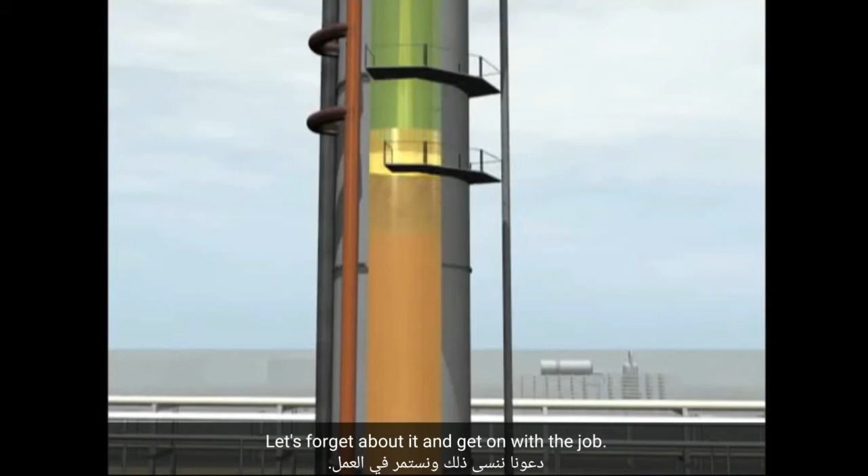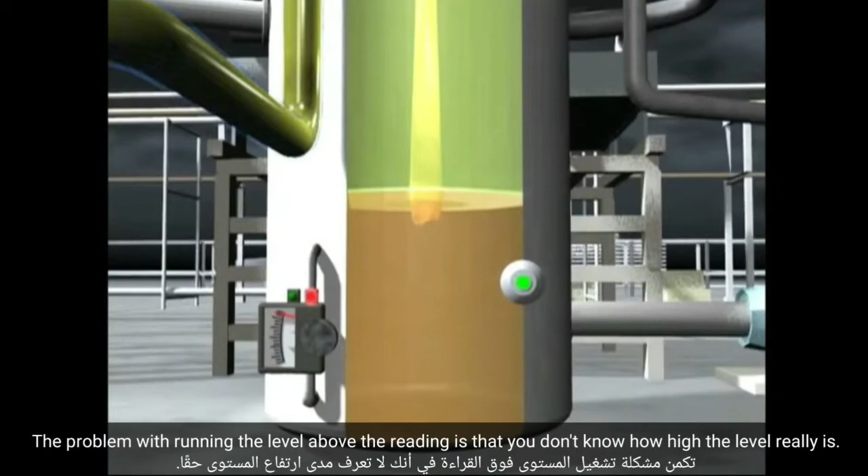For example, BP wasn't investigating abnormal conditions that were occurring repeatedly during startups of the ISOM unit. The CSB examined 19 previous startups in the 5 years prior to the ISOM incident and found in the vast majority of these startups, the operators ran a high level above the range of the level transmitter. The problem with running the level above the reading is that you don't know how high the level really is. This can lead to grossly overfilling the tower.

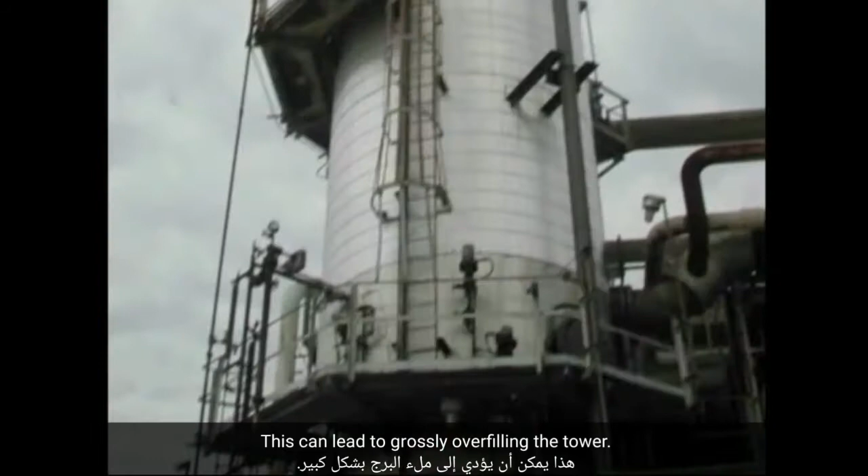But even though high levels and pressures could have led to a catastrophic accident, the previous startups were never investigated as near misses, and procedural deviations became accepted as normal. The CSB investigation also found 8 serious releases of flammable vapor from the ISOM blowdown drum, 2 of which caught fire between 1994 and 2004. Only 3 of the incidents were ever investigated.

Well, it's widely recognized now that you should investigate near misses, or really near accidents, what they call near misses, as thoroughly as you investigate accidents. After all, it's only a matter of luck whether a leak of flammable liquid or gas catches fire or not. In our final report, the CSB recommended that BP's Board of Directors establish a system to encourage reporting of incidents without fear of retaliation, to investigate and implement prompt corrective actions, and to communicate lessons throughout the company.

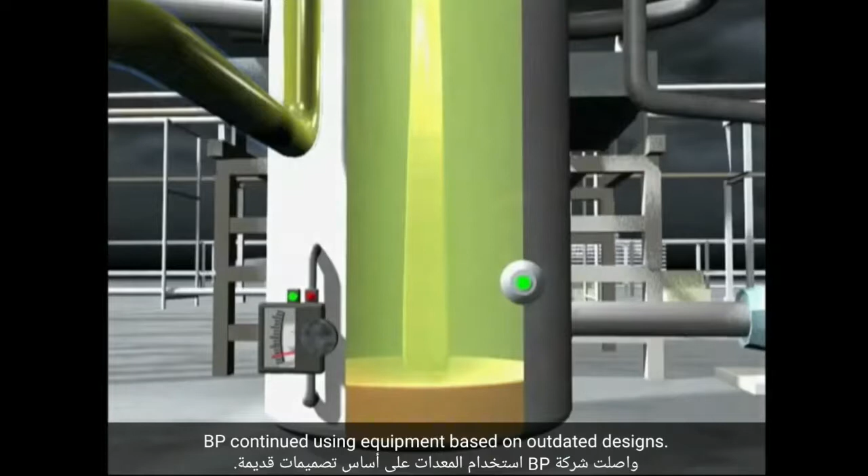The first choice after an accident is to say, how can we improve the design so this can't happen? How can we remove the opportunity for errors? Even as releases occurred over many years in the ISOM unit, BP continued using equipment based on outdated designs. The raffinate splitter tower lacked modern design safeguards, such as redundant level indicators and alarms, a differential pressure indicator, and automatic interlocks to prevent overfilling. In a well-designed plant, a simple error like closing the wrong valve shouldn't result in an accident.

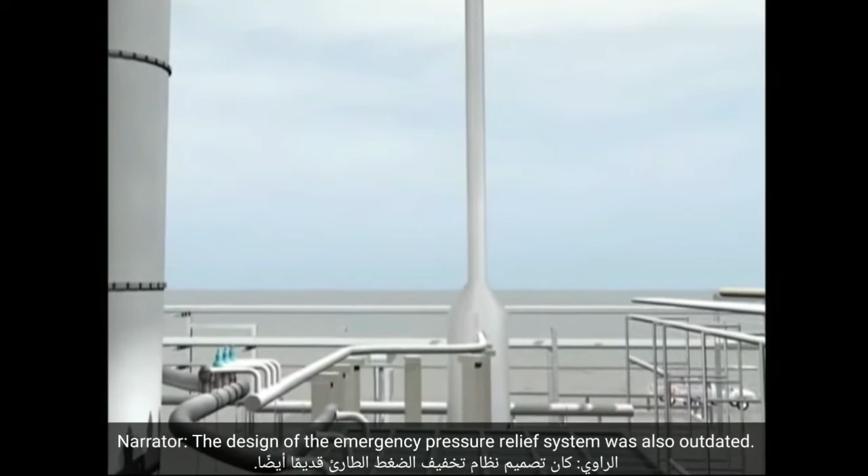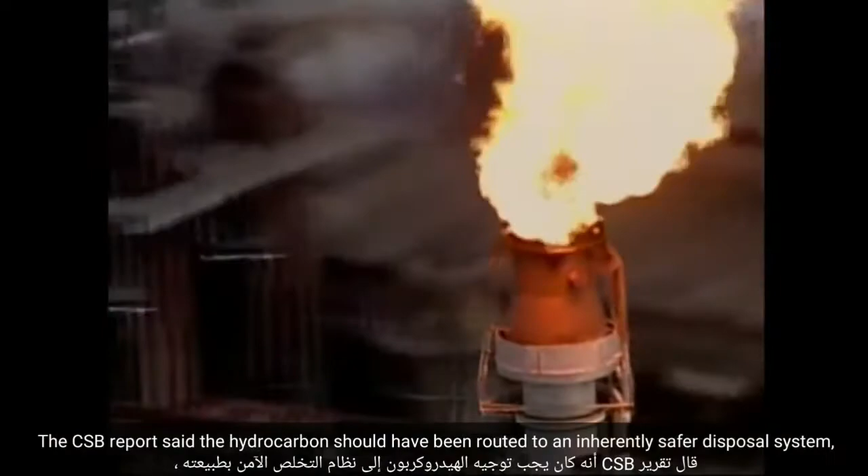The design of the emergency pressure relief system was also outdated. Relief valves vented hydrocarbons directly to the atmosphere through an antiquated blowdown drum, which was first installed in the 1950s. The CSB report said the hydrocarbon should have been routed to an inherently safer disposal system, such as a flare, to contain the hydrocarbon liquid and burn off flammable vapor.

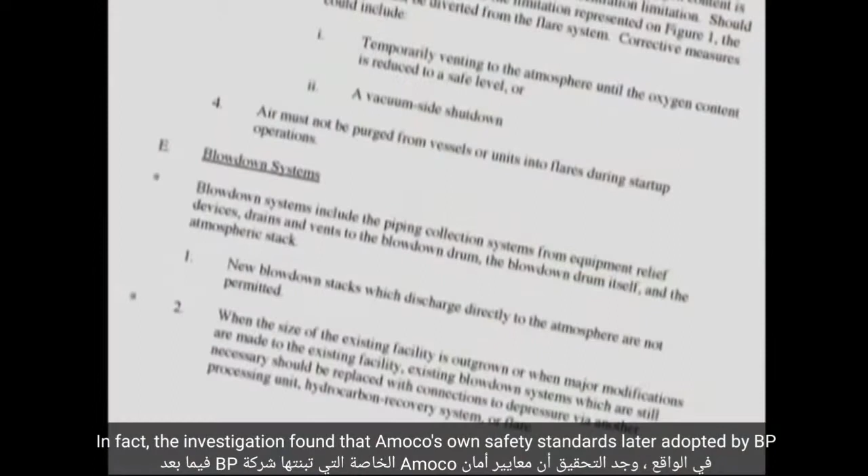In fact, the investigation found that Amoco's own safety standards, later adopted by BP, stated that new blowdown stacks which discharge directly to the atmosphere are not permitted. As facilities were upgraded, existing blowdown systems which are still necessary should be replaced.

Several occasions prior to the incident, BP had seriously considered connecting a flare to the ISOM unit. In the early 1990s, when Amoco owned the refinery, 3 proposals were made to replace blowdown stacks at Texas City. 2 more proposals were made in 2002 after the merger with BP. However, these decisions were impacted by production pressures and budget cuts, and the flare was never constructed.

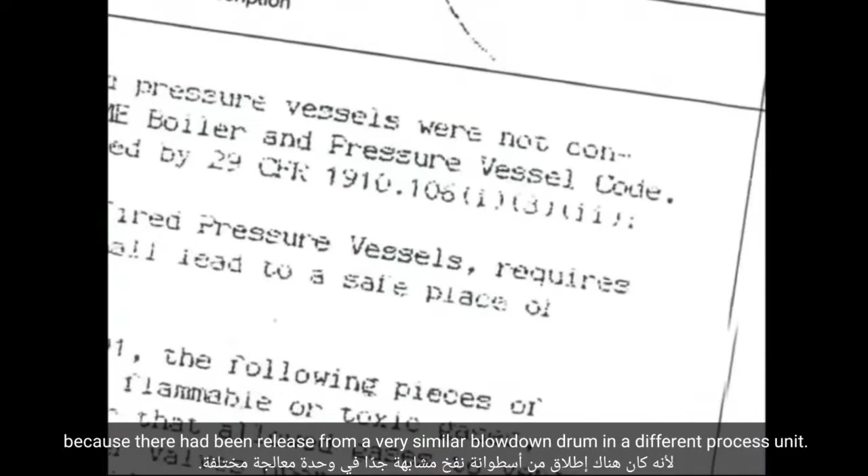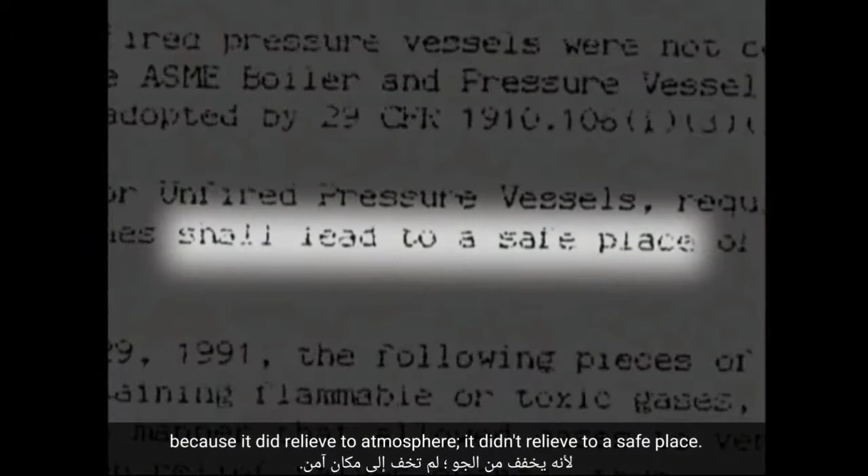In 1992, OSHA conducted an inspection at the Texas City refinery because there had been a release from a very similar blowdown drum in a different process unit. OSHA cited the then Amoco refinery for the unsafe blowdown system. OSHA determined that the design of the blowdown drum was unsafe because it did relieve to atmosphere. It didn't relieve to a safe place. But OSHA later withdrew the citation after Amoco asserted the equipment conformed to American Petroleum Institute standards.

In October 2006, the board issued a recommendation to the American Petroleum Institute calling for new guidelines that warn against the use of blowdown drums similar to those found in Texas City. We also recommended that OSHA implement a national emphasis program for all oil refineries focused on the hazards of blowdown drums that release to the atmosphere. Whenever possible, companies should use inherently safer systems, such as flares, instead of blowdown drums.

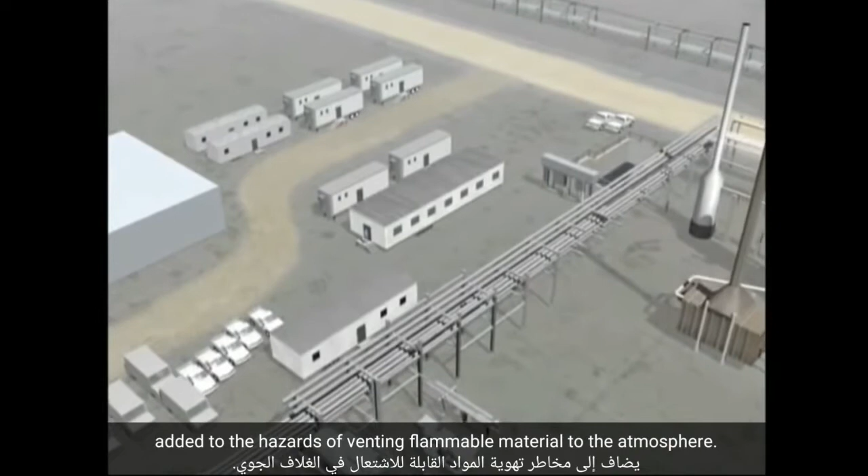The presence of occupied trailers near the blowdown stack added to the hazards of venting flammable material to the atmosphere. Prior to the incident and prior to the startup of the ISOM unit, a number of occupied trailers had been placed close to the ISOM unit. These trailers are occupied by workers who are not involved in the turnaround activities in the ISOM unit. The investigation found this was a key factor leading to the deaths of the workers.

They were right on top of the process in trailers as close as 120 feet from the blowdown drum, which is right at the edge of the isomerization process. CSB investigator Mark Kaszniak. Well, it is not safe to have trailers that close to a blowdown drum or at the edge of an active process in a petroleum refinery.

During an explosion in a refinery, you're actually safer in the open atmosphere than if you were working inside of a trailer. This is because the explosion overpressure will destroy the weak trailer construction, resulting in the formation of missiles and walls collapsing, which is potentially fatal to the occupants. The CSB determined that industry siting guidelines did not adequately protect trailer occupants from the fire and blast damage that can occur hundreds of feet from an explosion like the one at BP.

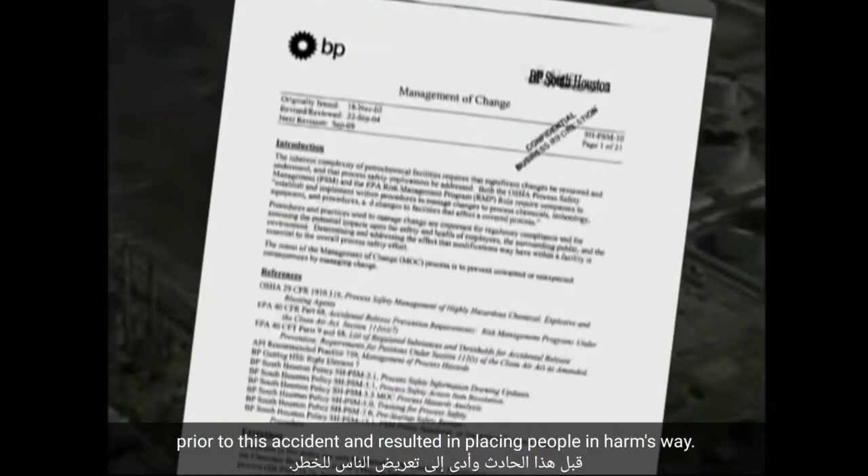We found that these guidelines were not safe enough prior to this accident and resulted in placing people in harm's way. In addition, BP did not follow its own management of change procedures before placing most of the trailers in a dangerous location. They did not assess the blast hazards posed to the trailer, and action items that were created during the review were never followed up and corrected. Ultimately, the decision on where to place the trailers was largely based on convenience, not safety.

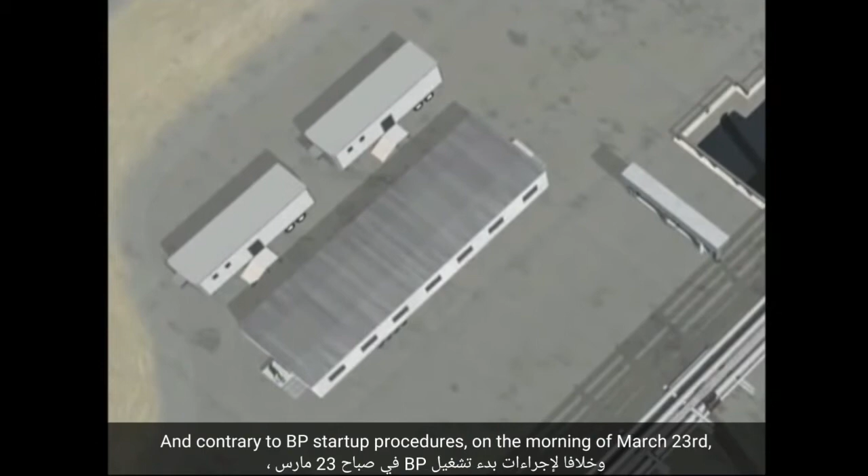And contrary to BP startup procedures, on the morning of March 23rd, managers did not remove personnel from the nearby trailers or even alert them that the potentially hazardous startup was taking place. The explosion totally destroyed 13 trailers and damaged 27 others, some as far away as 1,000 feet. People inside trailers as far away as 479 feet were injured.

In October 2005, the CSB issued an urgent recommendation to the American Petroleum Institute to revise industry standards and establish minimum safe distances for occupied trailers away from hazardous process areas. On June 21, 2007, the American Petroleum Institute issued new industry guidelines to minimize the presence of people and occupied trailers in hazardous process areas.

For a long time, people were saying that most accidents were due to human error. And this is true in a sense, but it's not very helpful. It's a bit like saying that falls are due to gravity. There were a number of human errors that contributed to the overfilling of the tower and the disaster that followed at Texas City. No one shows up to work planning to make mistakes. So we looked at the conditions in the workplace that would make error more likely. You really need to look at why the operators did what they did.

CSB Human Factors Specialist Cheryl MacKenzie. There were a number of human factors issues involved with this incident, including fatigue of the workers, training that was insufficient, and procedural deviations that occurred during the startup. The CSB investigation found that underlying conditions in the ISOM unit encouraged operators to consciously deviate from written operating procedures.

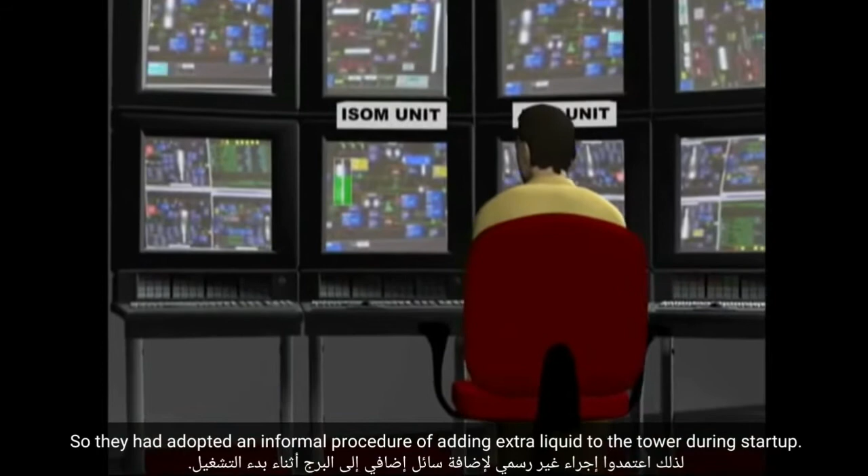The investigation found that operators were concerned that if they let the liquid level in the tower get too low during startups, it would damage the furnace. So they had adopted an informal procedure of adding extra liquid to the tower during startup. To do this, they placed the level control valve in manual, not the automatic mode required by procedures, and left the valve closed to raise the liquid above the recommended 6.5-foot level.

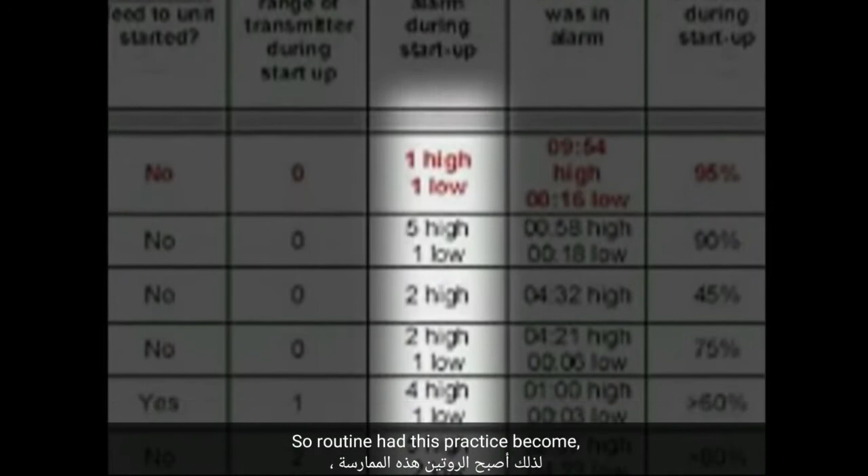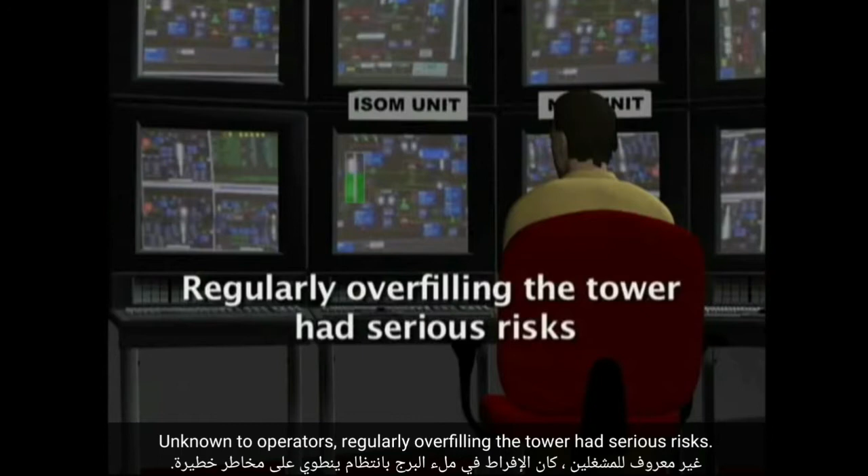So routine had this practice become, the CSB found that the tower's high-level alarm had activated 65 times during the previous 19 startups. The outdated operating procedures for the unit did not establish any safe upper limit for the liquid level in the tower. Unknown to operators, regularly overfilling the tower had serious risks. The tower's liquid level transmitter had a limited range, and should the liquid rise above the maximum reading of 9 feet, operators could not know if the tower was dangerously overfilling.

This informal practice of running the level in the raffinate splitter tower above the range of the transmitter led to running blind. They weren't aware of the dangers of overfilling the column, and so they tended to err on the side of what they saw as caution by overfilling the column. So their systematic deviation from what they should have been doing was actually well-intentioned. It was with the interests of the company at heart that they were violating the startup procedures.

But on the day of the accident, the routine deviation, overfilling the tower above the range of the indicator, coincided with a number of instrument failures, which impaired the board operator's decision-making. This had tragic results, as the board operator lost awareness of just how high the level was.

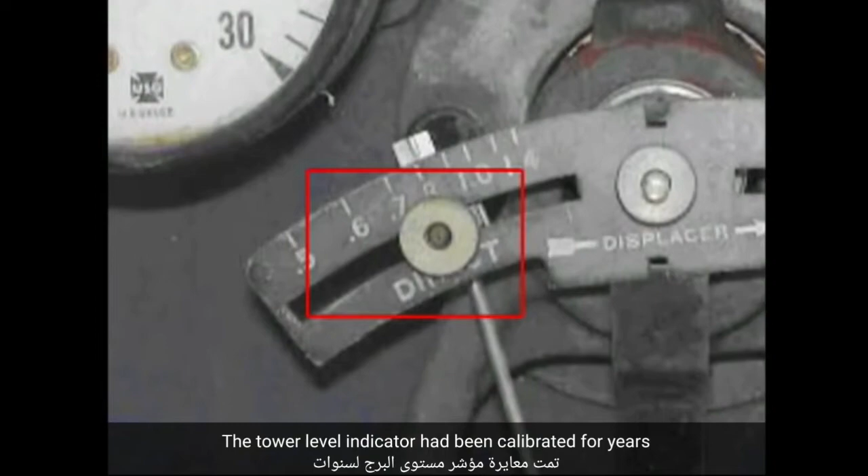The tower level indicator had been calibrated for years based on 1975 data for a different liquid used in a different process. As a result of the miscalibration, the indicator showed the level in the tower was declining just prior to the explosion, when it was actually increasing. And a backup high-level alarm on the tower failed to activate, seeming to confirm that the liquid level was dropping.

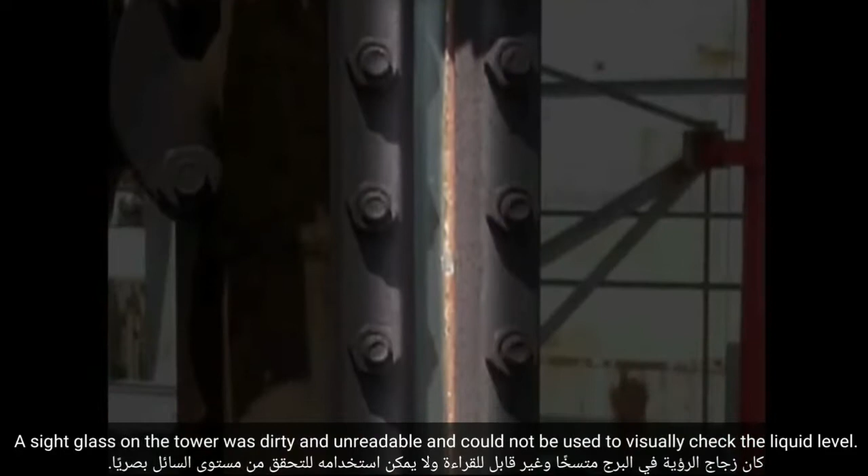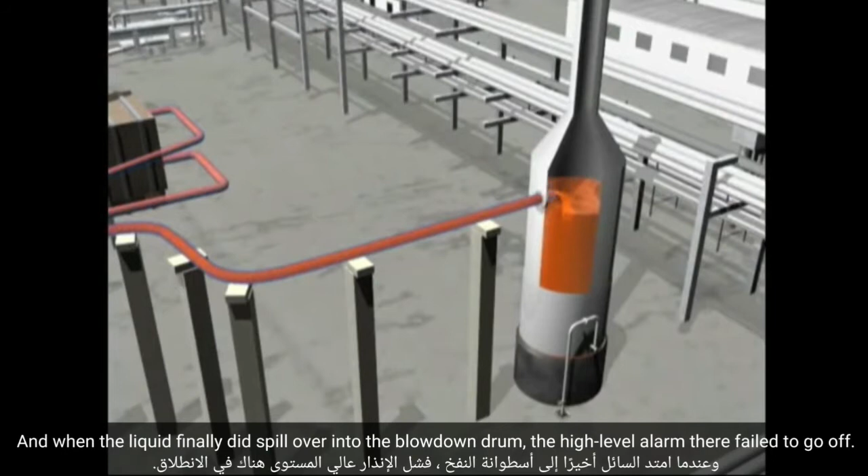A sight glass on the tower was dirty and unreadable and could not be used to visually check the liquid level. The investigation concluded that the board operator truly had no functional and accurate measure of the tower level on March 23, 2005. And when the liquid finally did spill over into the blowdown drum, the high-level alarm there failed to go off. BP procedures required that alarms in instruments and other equipment be checked for their functionality prior to startup. The CSB determined that these checks were largely not performed.

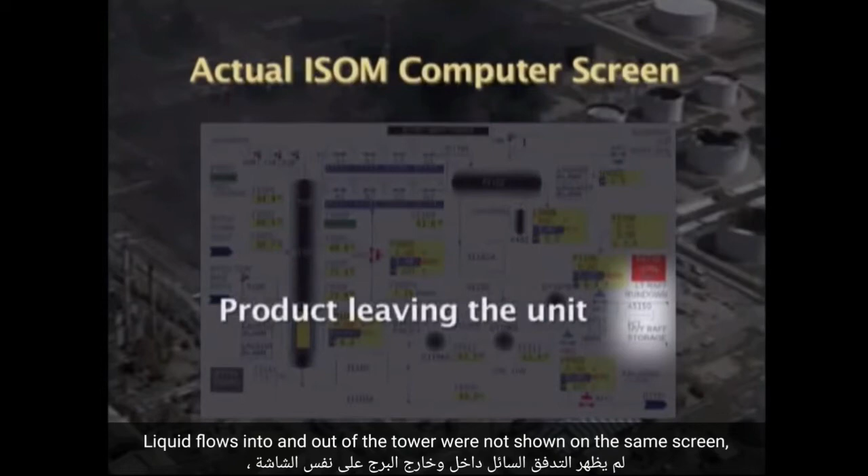A poorly designed computer display in the control room added to the difficulty of determining if the splitter tower was overfilling. Liquid flows into and out of the tower were not shown on the same screen, even though the computer could have been configured to do so.

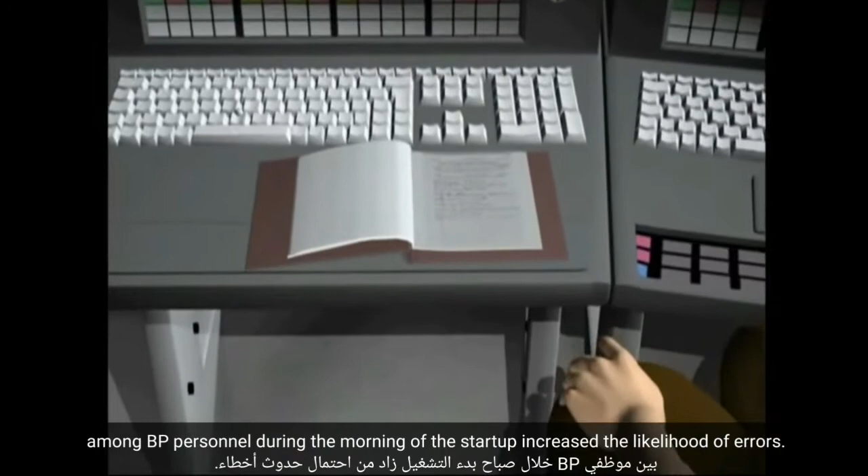The investigation also found that communication problems among BP personnel during the morning of the startup increased the likelihood of errors. Operators received contradictory instructions on where to send the products from the tower, and the day shift operators never got clear information from the night shift about how much liquid the tower already contained.

Well, then the board operator and the other operators that came in during the day shift really didn't understand what had occurred the night before. So they're starting up this unit without full knowledge of the state of the unit, and they're making judgments and decisions based on incomplete information.

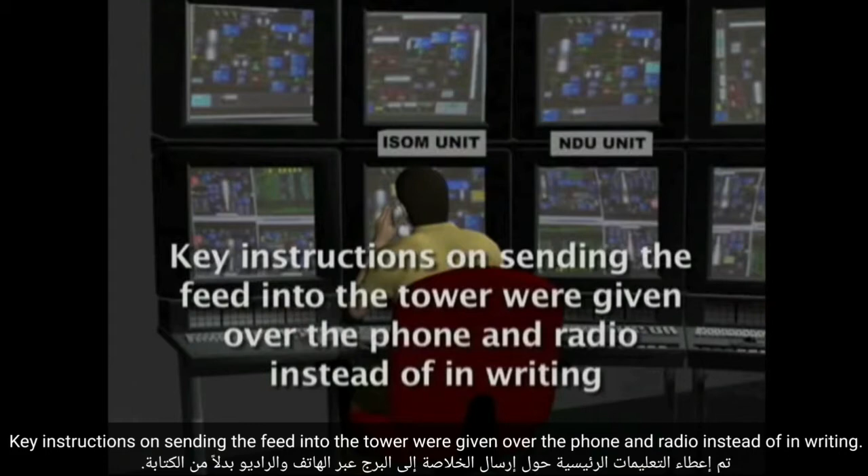The investigation found that BP lacked adequate policies and a management emphasis on effective communications. Key instructions on sending the feed into the tower were given over the phone and radio instead of in writing. Operators later told investigators these verbal communications were rushed and vague. Written communications in the logbook were brief and unclear.

Night shift operators did not conduct a crucial face-to-face meeting to brief day shift operators on the conditions in the unit. Therefore, they didn't realize how much liquid was in the tower and the equipment, so they added more, which led to the subsequent overfilling of the tower, which later led to the release.

The opportunities for human error were multiplied by the lack of adequate supervision, staffing, and training at the refinery. Training had been downsized, and that training was largely delivered through computerized means rather than face-to-face training. BP did not train operators on the hazards of overfilling towers, and training for abnormal situations was insufficient.

Despite recommendations dating back 5 years, simulators were not used to train board operators on making critical decisions. As noted in an internal BP email about simulators 3 weeks after the accident, "Big pushback has always been initial cost." Budget pressures also impacted control room staffing. BP implemented a 25% cost reduction in '99.

During the same time period, BP downsized the board operators in the ISOM unit from 2 to 1. Later, BP added an additional process unit to the responsibilities of the board operator in the ISOM unit. The result was that you had 3 complex refinery units under the supervision of one board operator.

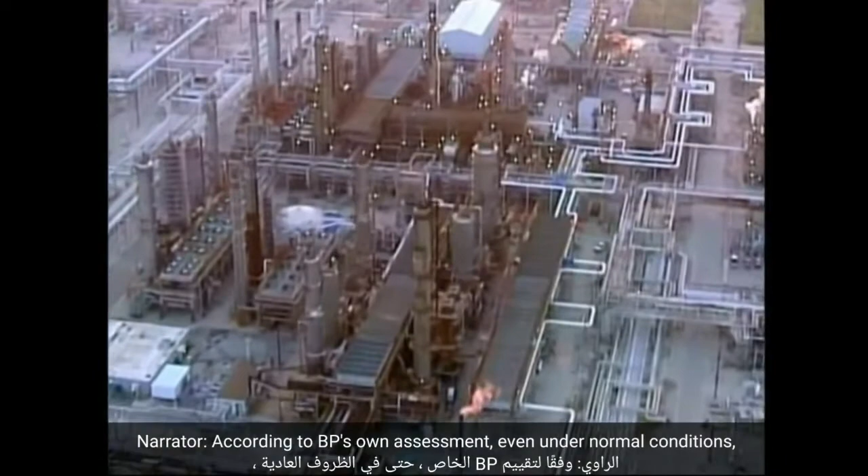According to BP's own assessment, even under normal conditions, monitoring and controlling these 3 units would require 10.5 hours of the board operator's 12-hour shift. But the startup of the ISOM unit would demand significantly more time and attention from the operator, whose workload was already nearly full.

And when the startup began to encounter problems late that morning, supervisory oversight of the board operator was absent. BP's own policies required that a supervisor or technically trained person be present during startup because it's an especially hazardous period. The supervisor who showed up on March 23rd left due to a family emergency, and there was no replacement.

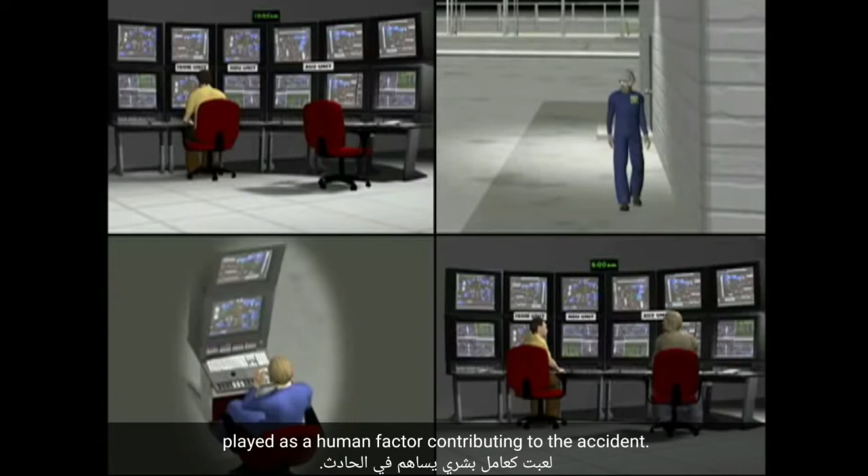Finally, investigators looked at the role operator fatigue played as a human factor contributing to the accident. Fatigue can affect performance in many ways. It can cloud decision-making, it can delay responses to actions on a control board, and it can lead an operator to miss out on what's going on overall in a unit.

Fatigue can impair judgment. It can lead an operator to fixate on one operational parameter, such as the declining level, and lose track of other factors, such as liquid being added to the tower for 3 hours and no liquid being removed. ISOM unit operators had been working 12-hour shifts for at least 29 days prior to the accident.

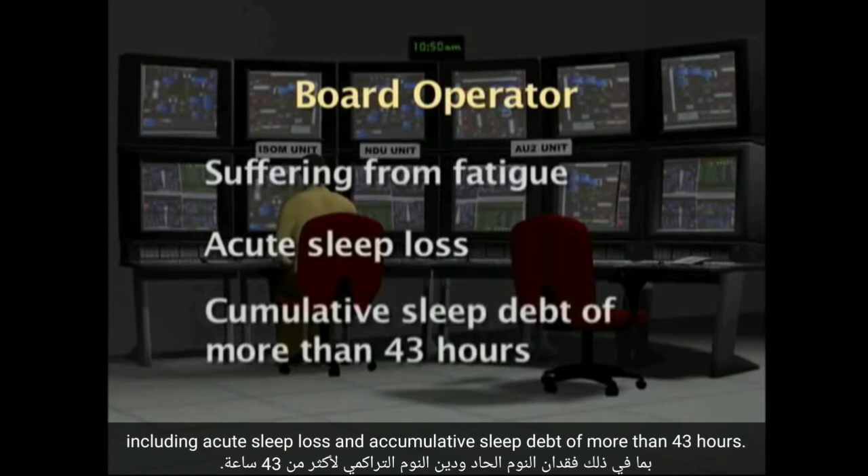In particular, the board operator was likely suffering from fatigue, including acute sleep loss and a cumulative sleep debt of more than 43 hours. We determined that BP had no fatigue prevention policy, and in fact there was no fatigue prevention policy in the industry as a whole.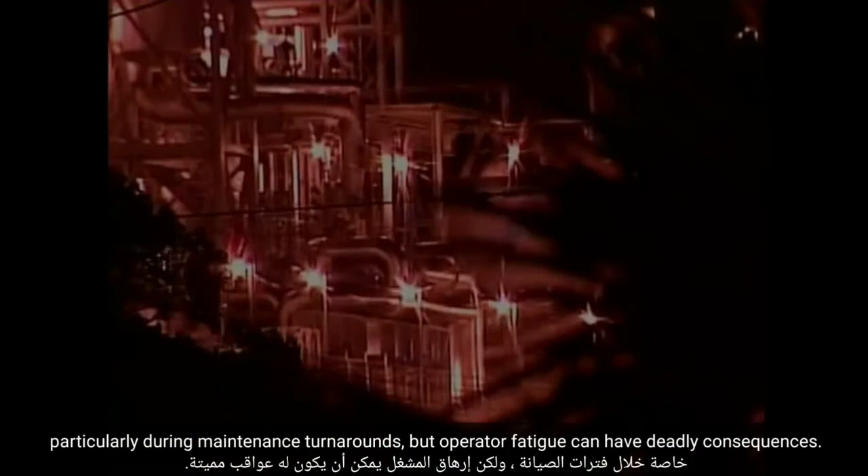Companies and employees may believe they benefit from overtime schedules, particularly during maintenance turnarounds, but operator fatigue can have deadly consequences. Our final report recommended that the United Steelworkers and the American Petroleum Institute develop new guidance on preventing fatigue in the petrochemical industry, including limits on hours and days at work.

OSHA's 1992 Standard on Process Safety Management, or PSM, requires thousands of oil and chemical facilities to implement 14 management elements to prevent catastrophic releases. The Environmental Protection Agency has similar requirements under its risk management program. The CSB investigation revealed many long-standing deficiencies in the BP refinery's compliance with federal process safety regulations.

Preventive maintenance and testing procedures were inadequate for key alarms, instruments, and equipment. Required safety studies of pressure relief systems were years overdue. Operating procedures were out of date. And there were other flaws. Management of change reviews were not conducted for critical design, equipment, and procedural changes. Hazard analyses were poor, overlooking serious fire and explosion risks. Audits revealed many process safety problems, but they were never resolved.

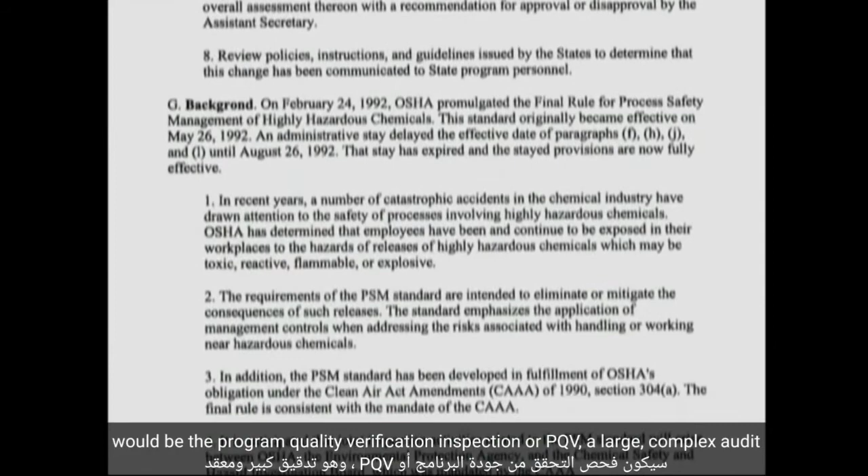OSHA's enforcement program for the PSM regulations requires planned, comprehensive inspections of facilities with accident histories or other indications of catastrophic risks. A 1992 OSHA directive stated the primary enforcement tool would be the Program Quality Verification Inspection, or PQV, a large, complex audit involving highly trained OSHA inspectors and taking weeks or months to complete.

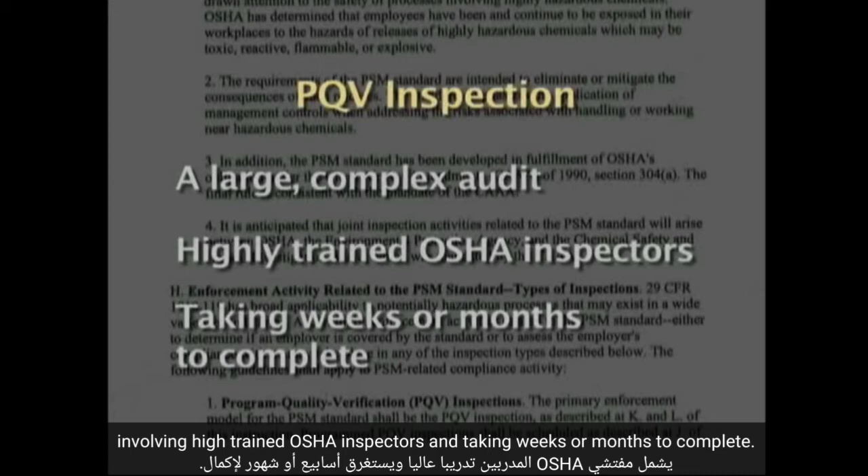Despite the fact that the BP Texas City refinery had a long history of fatality incidents, there was no program quality verification or intensive PSM inspection conducted at that refinery. OSHA did conduct smaller, unplanned inspections of the Texas City refinery in response to accidents and complaints. But these inspections did not uncover major flaws in process safety management compliance.

In fact, the CSB found that OSHA conducted only a handful of program quality verification (PQV) inspections at the thousands of regulated facilities across the country. There's no set interval when OSHA comes in and inspects a plant in the United States. We found that inspections in the U.S. are largely driven by personal injury statistics.

The CSB also found that prior to March 2005, the EPA never audited the Texas City refinery for compliance with risk management requirements. Other jurisdictions inspect process plants more frequently. In California's Contra Costa County, a local process safety ordinance requires thorough inspections of 8 major oil and chemical plants every 3 years by a team of specialized engineers.

In the United Kingdom, 105 specialists from the Health and Safety Executive inspect high-hazard facilities every 5 years. In addition, all 9 refineries in the UK are inspected annually. If accepted process safety principles had been thoroughly implemented at the refinery, this accident likely would not have occurred.